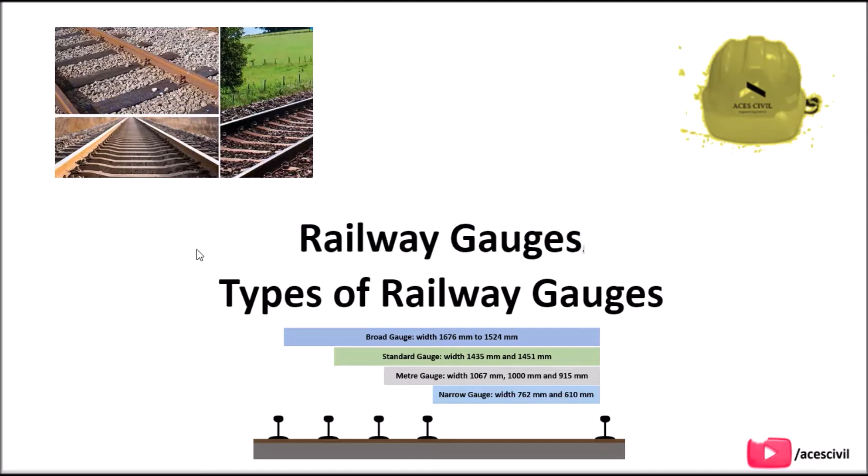In today's video we are going to discuss railway gauges. Types of railway gauges. Gauge is the measure of distance between the railroad rails. The distance is usually measured from the inside top edge of the parallel rails. That is, the distance between the two tracks on any railway route is known as railway gauge.

Approximately 60% of the world's railways use standard gauge of 1,435 mm. There are four types of railway gauge used in India: broad gauge, meter gauge, narrow gauge and standard gauge, for Delhi Metro.

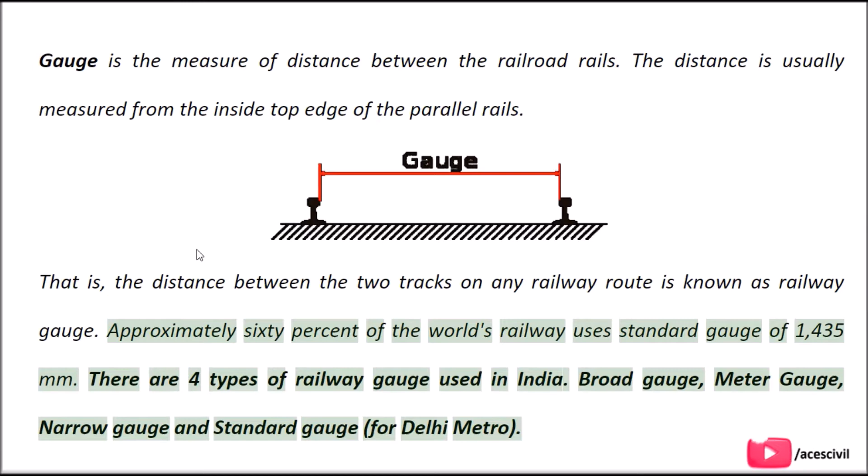Following are the factors affecting the choice of a gauge. 1. Traffic condition. If the intensity of traffic on the track is likely to be more, a gauge wider than the standard gauge is suitable. 2. Development of poor areas. The narrow gauges are laid in certain parts of the world to develop a poor area and thus link the poor area with the outside developed world.

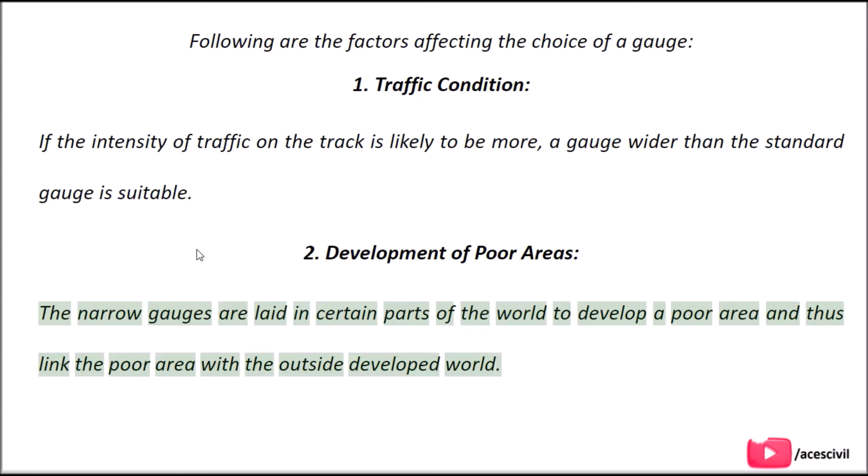Cost of track. The cost of railway track is directly proportional to the width of its gauge. If the fund available is not sufficient to construct a standard gauge, a meter gauge or a narrow gauge is preferred rather than to have no railways at all.

Speed of movement. The speed of a train is a function of the diameter of wheel, which in turn is limited by the gauge. The wheel diameter is usually about 0.75 times the gauge width, and thus, the speed of a train is almost proportional to the gauge. If higher speeds are to be attained, the B.G track is preferred to the M.G track.

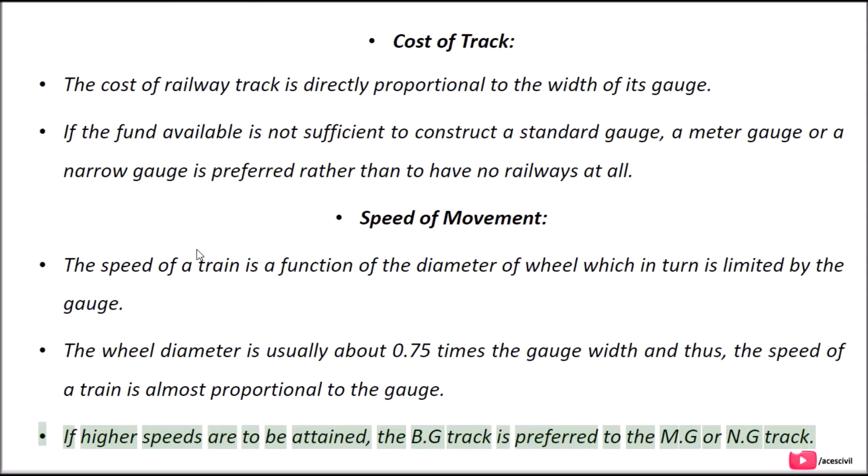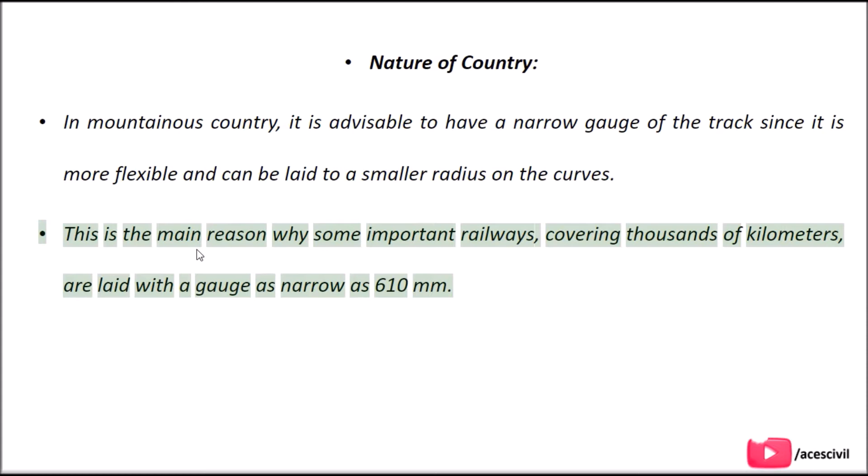Nature of country. In mountainous country, it is advisable to have a narrow gauge of the track since it is more flexible and can be laid to a smaller radius on the curves. This is the main reason why some important railways, covering thousands of kilometers, are laid with a gauge as narrow as 610 mm.

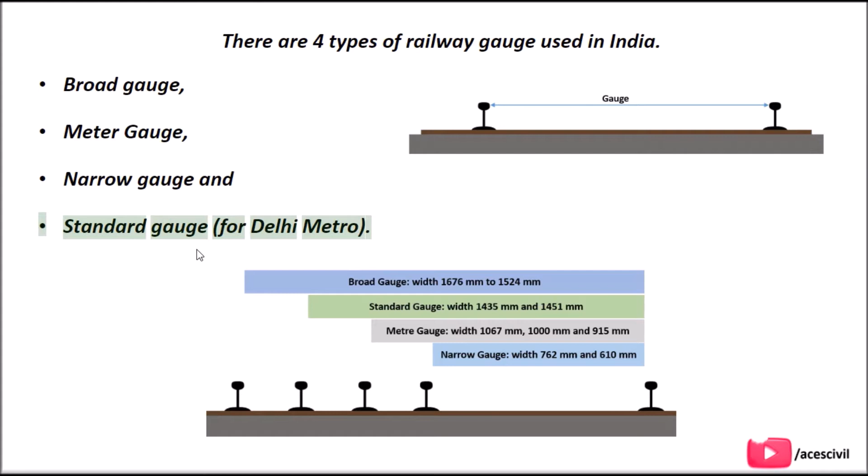There are four types of railway gauge used in India: broad gauge, meter gauge, narrow gauge and standard gauge, for Delhi Metro. Broad gauge. Broad gauge is also called wide gauge or large line. The distance between the two tracks in these railway gauges is 1,676 mm, 5 feet 6 inches.

It would not be wrong to say that any gauge wider than standard gauge, or 1,435 mm, 4 feet 8 1/2 inches, is called broad gauge. The first railway line built in India was a broad gauge line from Bori Bunder, now Chhatrapati Shivaji Terminus, to Thane in 1853.

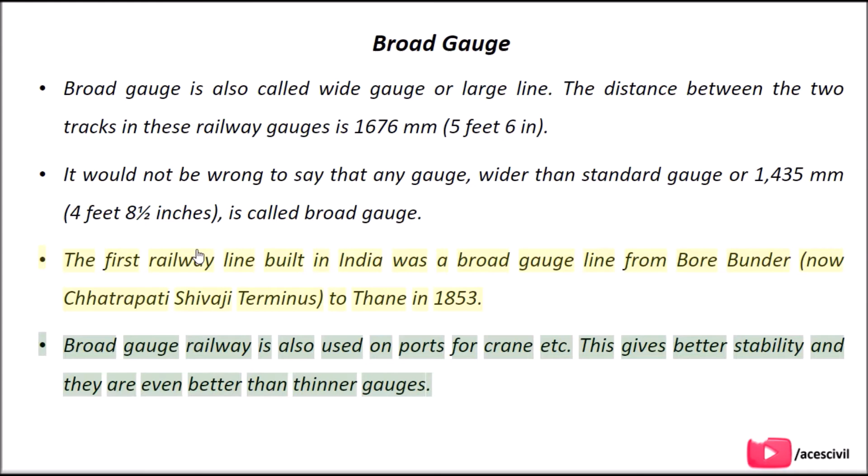Broad gauge railway is also used on ports for cranes etc. This gives better stability and they are even better than thinner gauges. The broad gauge line is the most widely used in India with approximately 108,500 kilometers, 67,400 miles, of track length and 60,430 kilometers, 37,549 miles, of route length in 2016. It is also called Indian gauge and is the broadest gauge in operation in the world.

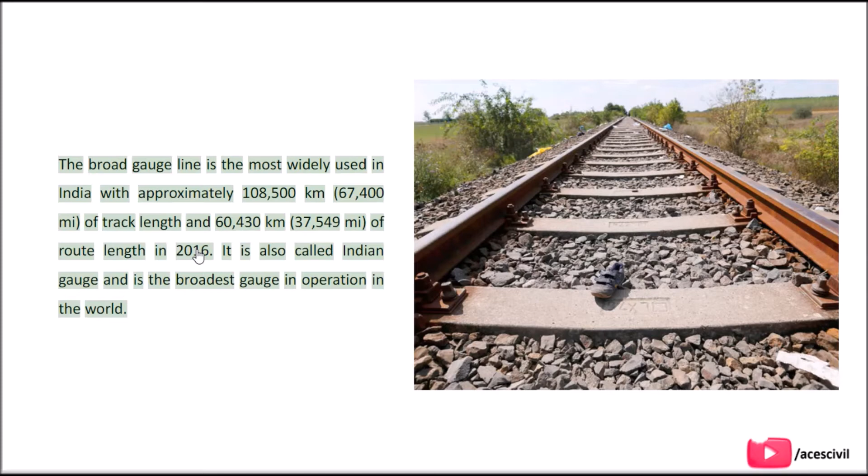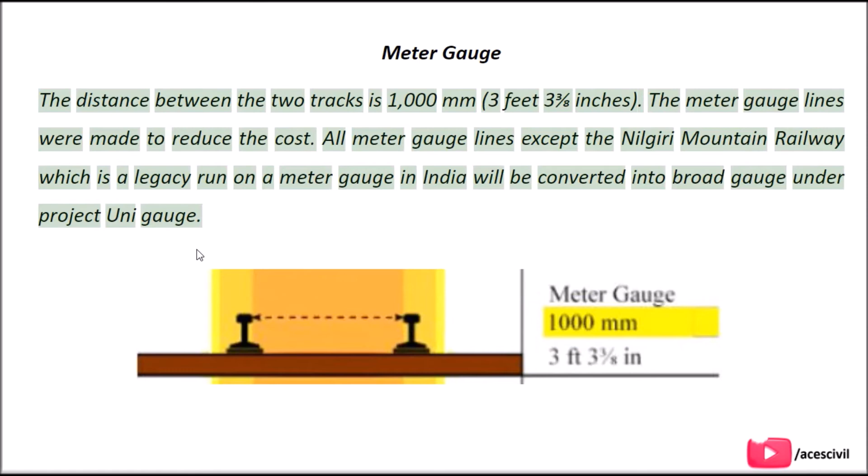Meter gauge. The distance between the two tracks is 1000 mm, 3 feet 3⅜ inches. The meter gauge lines were made to reduce the cost. All meter gauge lines except the Nilgiri Mountain Railway, which is a legacy run on a meter gauge in India, will be converted into broad gauge under Project Unigauge. 1000 mm, 3 feet 3⅜ inches. Meter gauge, MG.

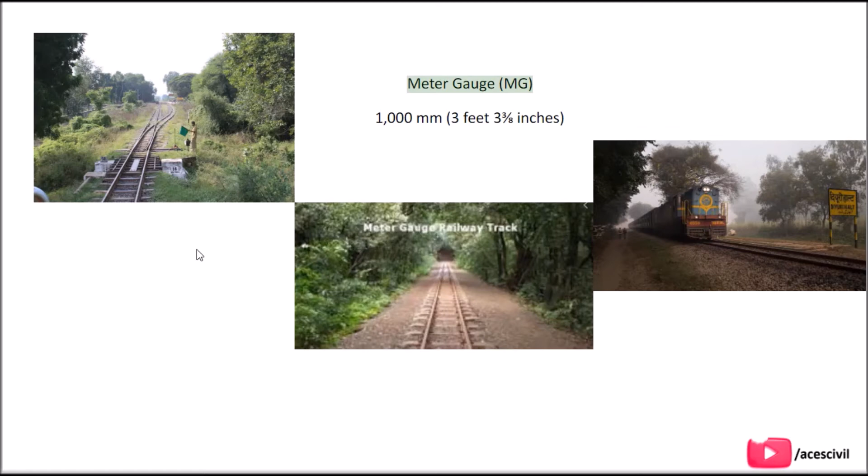Narrow gauge. The small gauge is called a narrow gauge or a small line. The narrow gauge railway is the railway track in which distance between two tracks is 2 feet 6 inches, 762 mm, and 2 feet, 610 mm. In 2015, there was a 1,500 km narrow gauge rail route, which is considered to be about 2% of the total Indian rail network.

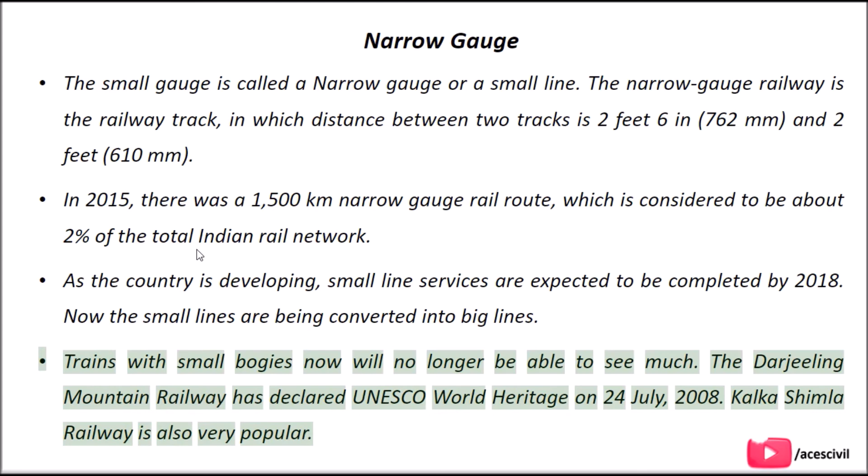As the country is developing, small line services are expected to be completed by 2018. Now the small lines are being converted into big lines. Trains with small bogies will no longer be seen much. The Darjeeling Mountain Railway was declared a UNESCO World Heritage Site on July 24, 2008. Kalka-Shimla Railway is also very popular. Narrow gauge 2 feet 6 inches, 762 mm, and 2 feet, 610 mm.

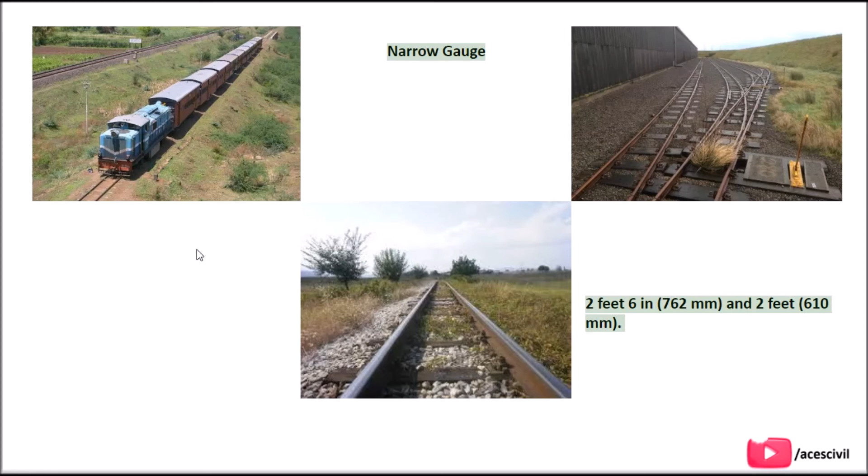Standard gauge. Standard gauge in many countries of the world is 1435 mm. This measurement was developed by George Stephenson, a British railway engineer, using the width of coal wagons that were in use before the invention of the steam locomotive.

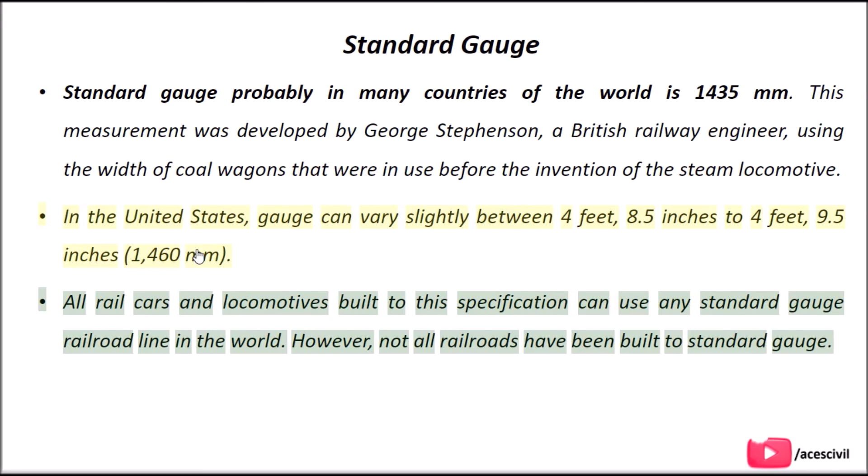In the United States, gauge can vary slightly between 4 feet 8.5 inches to 4 feet 9.5 inches, 1,460 millimeters. All rail cars and locomotives built to this specification can use any standard gauge railroad line in the world. However, not all railroads have been built to standard gauge. A standard gauge railway is a railway with a track gauge of 1,435 mm, 4 feet 8 1/2 inches.